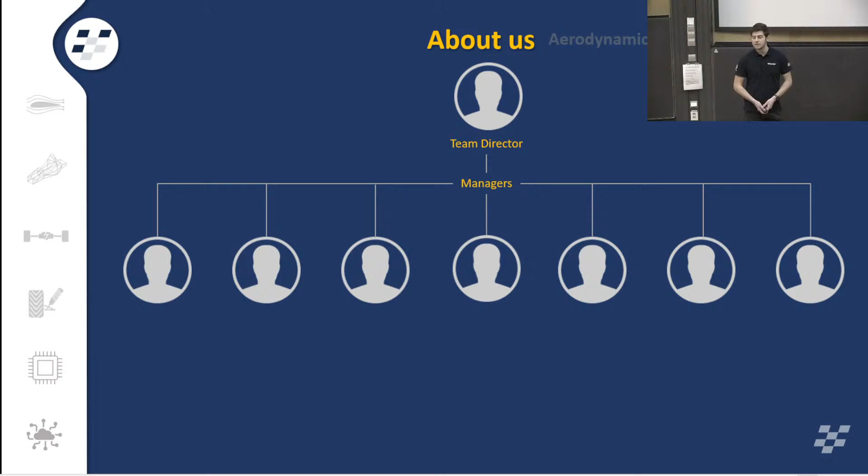The project engineers, such as myself, are all placed under each subgroup and are students studying at the master's level. In addition to this, we also have trainees that voluntarily work towards a faster car and help us out a little bit.

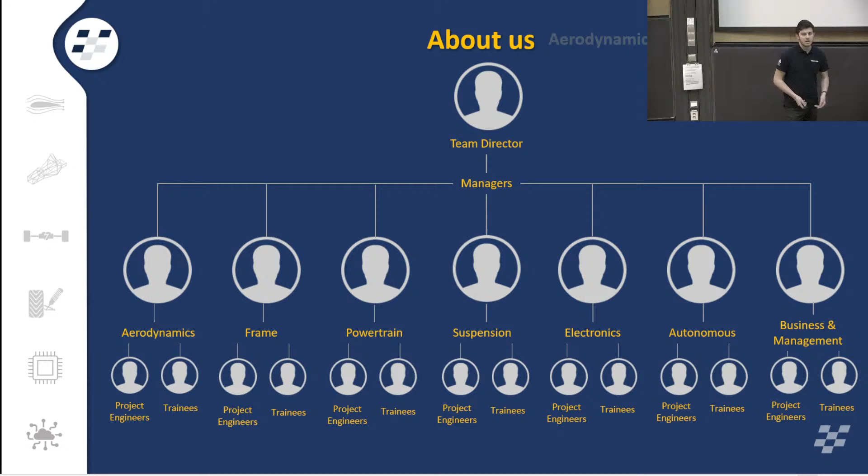After more than 50,000 hours, more than 400 liters of coffee, and over 500 takeaway pizzas ordered from our formula room, we're proud to, for the very first time, present to you the design of our Chalmers Formula Student 2023 car.

A four-wheel driven, fully electrical, both driverless and driver-suited Chalmers Formula Student car. Named after a former queen of Sweden and also a delicious pizza, we're glad to name this year's car Margareta.

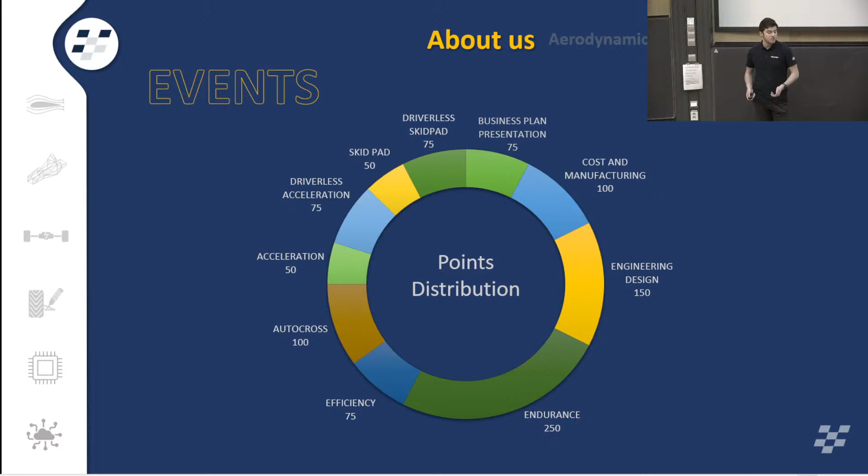The competitions are divided into separate demanding events, where points can be gathered for each successfully completed part. This is how the total amount of points is distributed. The car is tested on endurance, efficiency, acceleration, and its longitudinal and lateral capacities. There are also static events, where it is important to show that the car is not only fast, but also sustainable, appealing, and economical to manufacture.

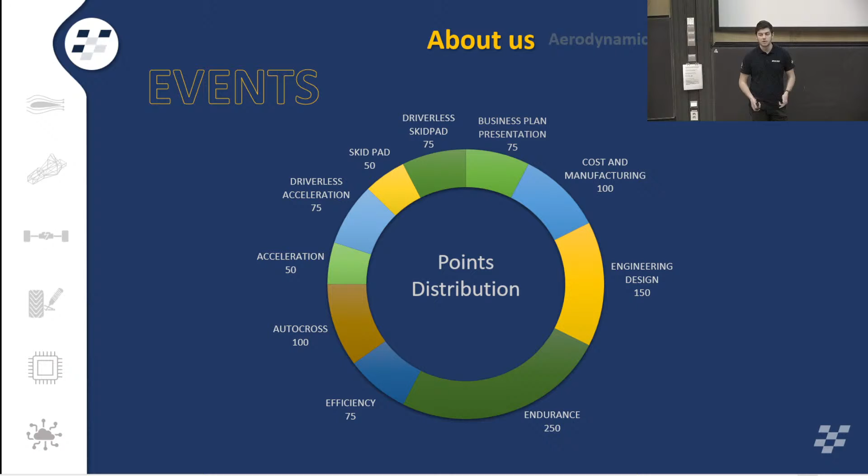With that said, I think it is time to let some of the experts from manufacturing speak for themselves and present how their part is making Margareta as amazing as possible. First up is the subgroup Aero with Hjalmar. Welcome up.

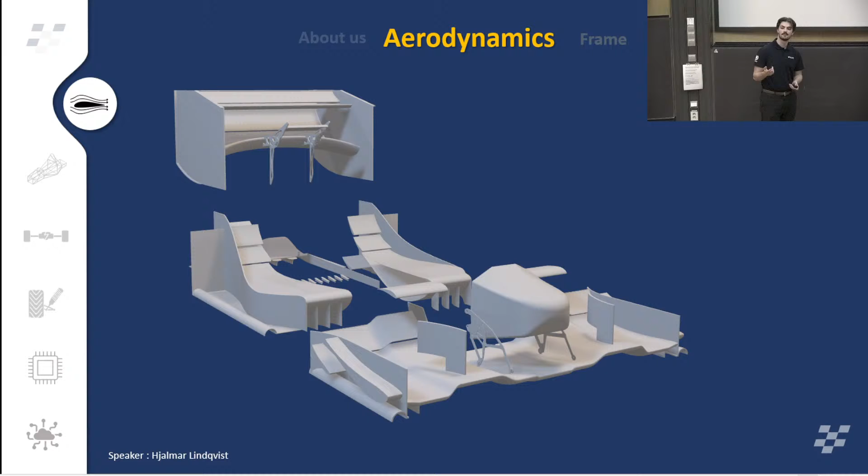Thank you, Kevin. Hello, my name is Hjalmar and I'm representing the Aerodynamics subgroup. Together with my subgroup, we have produced this year's aero package of the car, which you can see here. To make a race car, one important factor is the car's grip. And that's where we come in with one simple word: downforce.

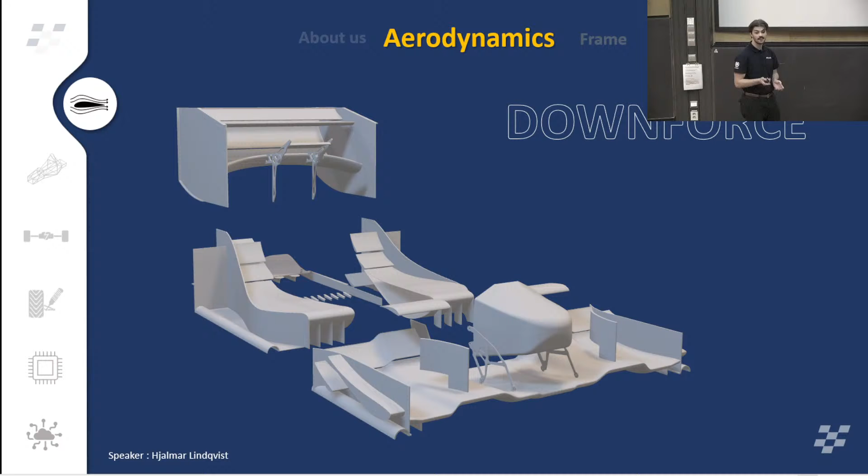Many of you may know, but downforce is the negative lift we can produce by using aerodynamical elements on the car to push the car down into the ground and thus increasing its grip and its cornering velocity, and decreasing lap time. I think we'll delve a bit deeper into the design, so we'll start off with the front wing.

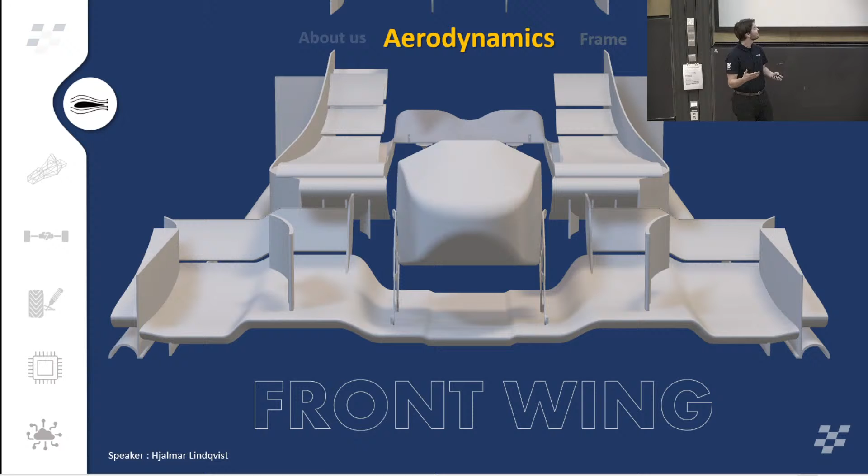The front wing is a very crucial part of the aero package, as it produces a lot of downforce and provides grip for the front end of the car, so the front wheels. But it's also important to make a front wing that doesn't disturb the rest of the aero package behind it. So it's a hard thing to balance the performance of the individual part and the performance of the rest of the car.

Secondly, we have our side structures. The side structures work as large expansion tunnels, which increase the velocity of the air and decreasing the pressure under the car, sucking it down to the ground.

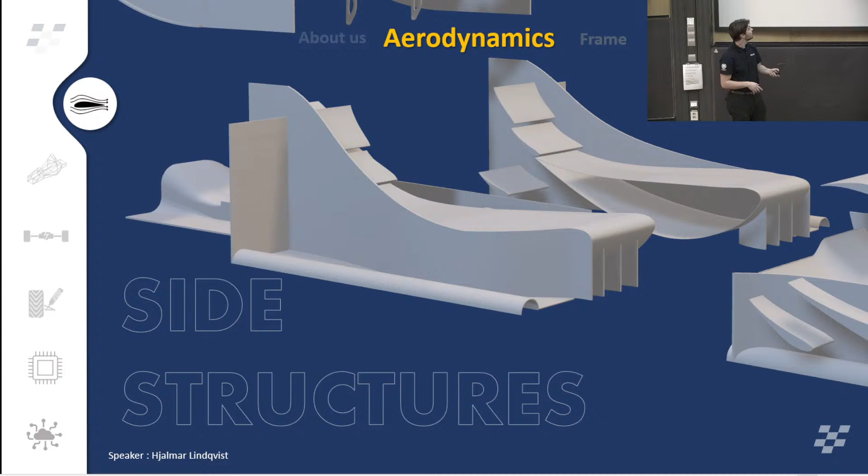Then we have our diffuser. The diffuser works similarly to the side structures by expanding and making a low pressure zone under the car. With this year's reintroduction of the aero step on the monocoque, we now have almost double the amount of

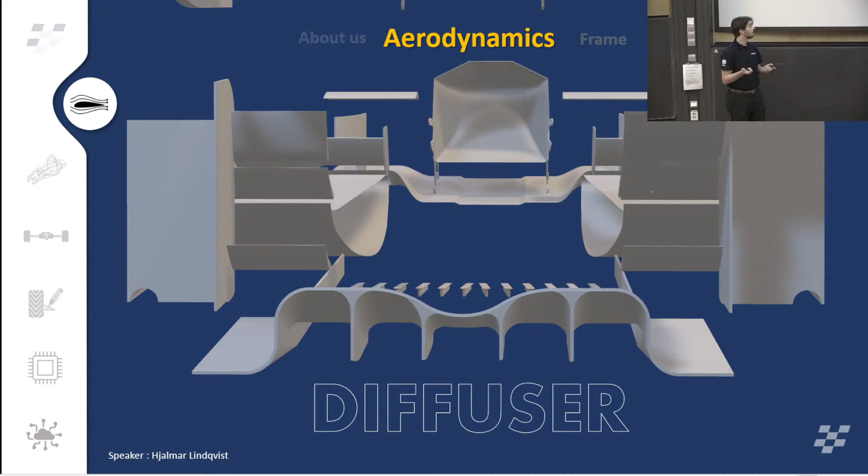downforce than we had last year's on the diffuser, which we are very happy with. Then lastly on the car, we have the rear wing. The rear wing on a Formula Student car is quite huge, because we have such a large volume to work with. This year it has been completely revamped with a new main segment and new smaller flaps like the overwing and other stuff to increase its performance.

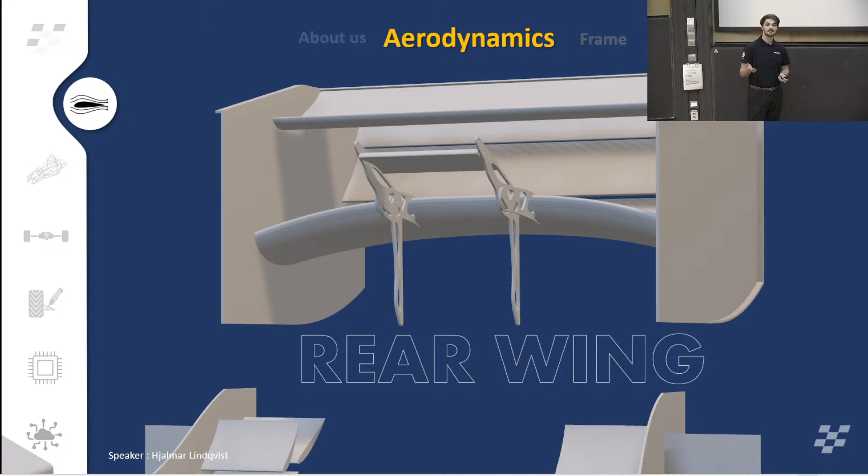And then our final aero package now. I would just like to show you some of our improvements. We have an increase in downforce from last year's car of 10%, with a CLA, a coefficient of lift times the area, of 4.9, which is very respectable. We have also decreased the weight of the entire aero package to 9 kilograms, which we are very happy with.

And with that, I would like to hand you over to Elin, who's going to talk about the frame of the car.

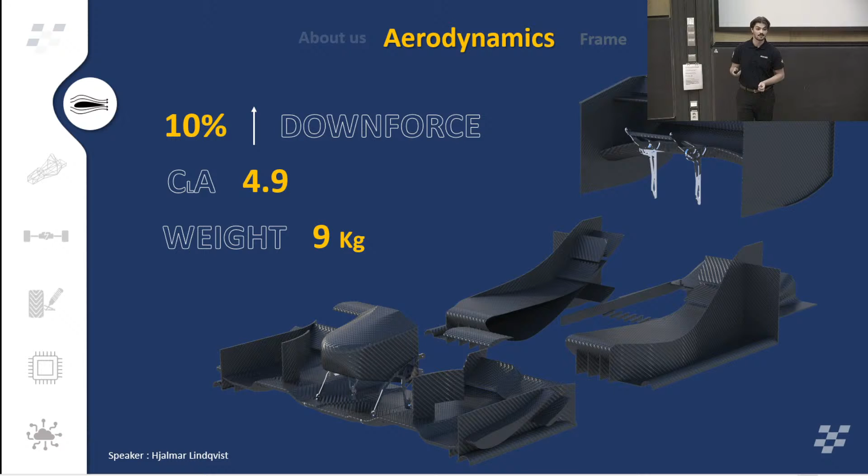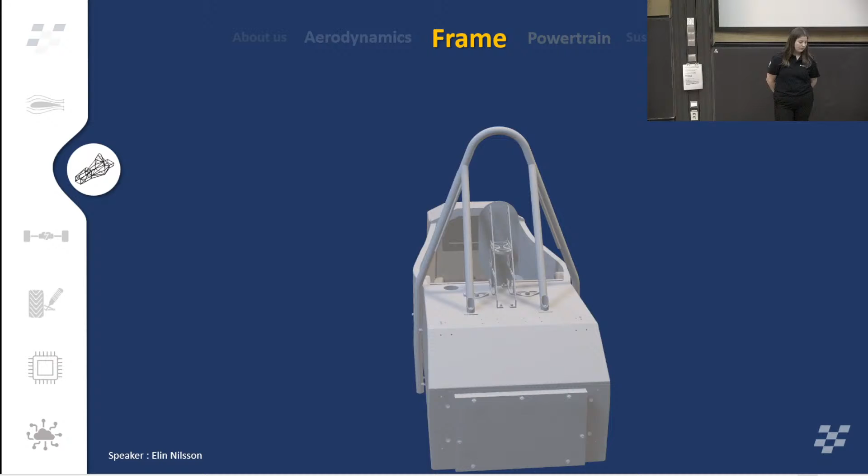In frame we work with the body of the car, the ergonomics of the driver and the safety for the driver. A big focus for us is the safety and of course the strength of the monocoque. We work a lot with packaging to make sure that everything that's supposed to fit in the car can actually fit in the car. We also do a lot with ergonomics this year to make sure the driver can drive as well as possible.

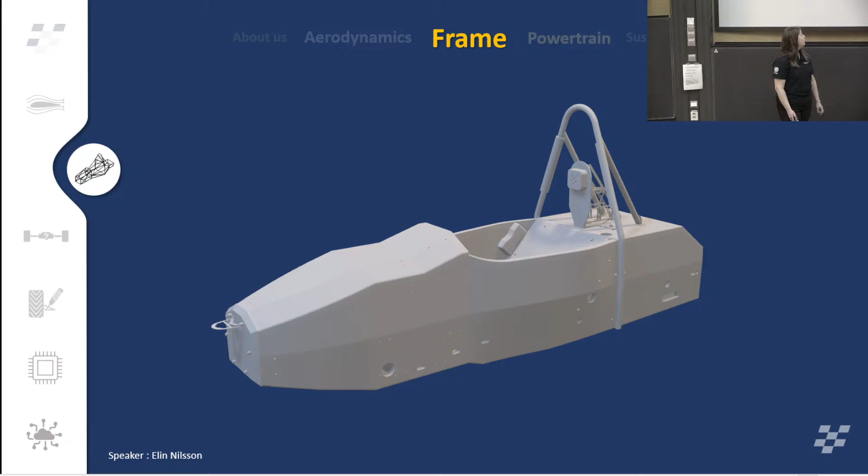The biggest part we have is the monocoque, which is the first thing we're going to talk about. Without it, it's very hard to assemble a car, so that's the biggest reason to make one. The big question is why make a monocoque instead of a tube frame? First, we gain a lot of design freedom in how we want to design the car. We also gain a lot of stiffness through the car, which is very important to transfer the loads from the rear to the front.

The monocoque is made out of sandwich panels that are constructed out of carbon fiber and aluminium honeycomb core. From competitions, we have a lot of requirements on the material to make sure it's safe. These requirements are adapted to a steel tube frame. We do a lot of material testing on our materials to make sure that we can apply to the same requirements.

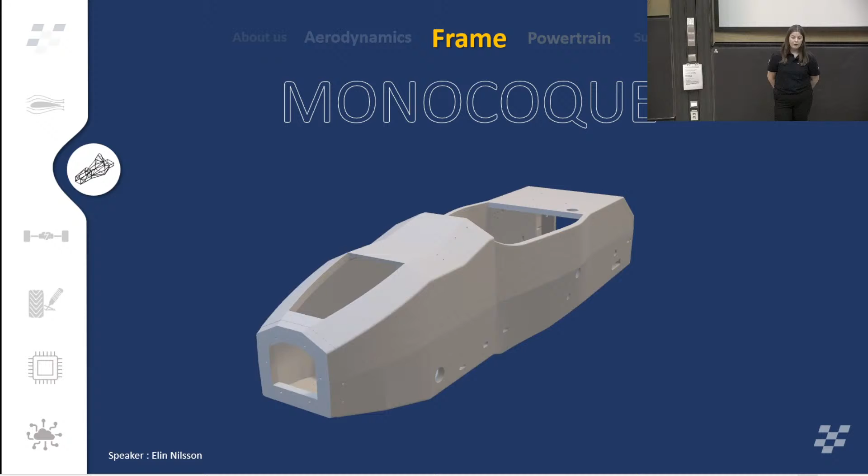The monocoque this year, we are trying to work with simpler shapes to make sure that it's easy to manufacture. We have worked with less carbon fiber to reduce the weight. Some of the features this year that we have introduced is the aerostep, which can be seen in the front floor of the car. We have also reduced, or taken away, the dashboard, which makes it a lot easier to manufacture and reduces manufacturing time. The dash will instead be attached later as a screen.

Next up, we have ergonomics. That's something we worked a lot with this year, we focused a lot of our time on. This is very important for the driver to drive as good as possible. And for us, it's been a big iterative process. We made an ergonomics sheet where we could test all the possible solutions for the drivers to feel what feels best for them.

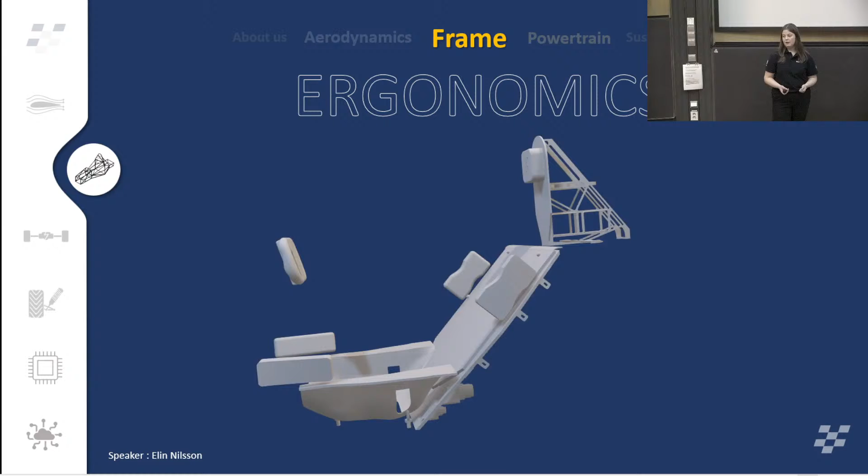First, we have a seat. The seat supports the driver, the bottom part of the driver. We have paddings for the shoulders and legs to be able to take up the lateral loads for the driver. We have optimized the position of the steering wheel as well to make sure the driver has enough space to be able to turn the car well.

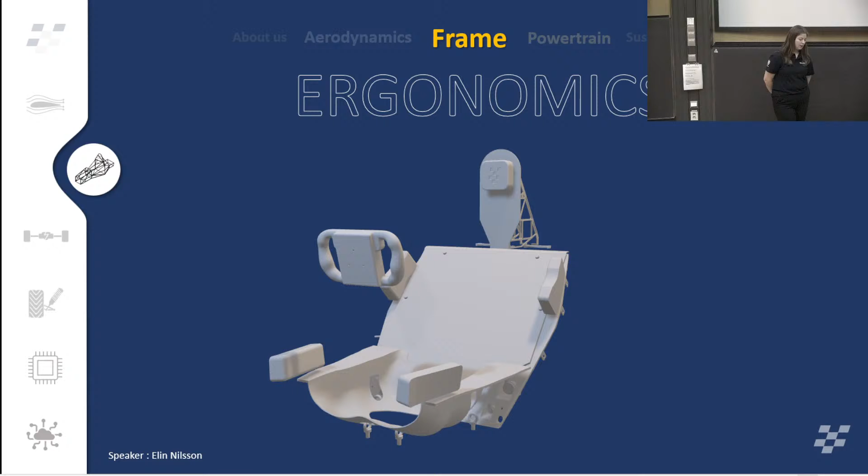Another thing that's very important is, of course, the safety. Safety is something we work with a lot, and there's a lot of requirements on the monocoque, and we have some parts that are designed purely for safety.

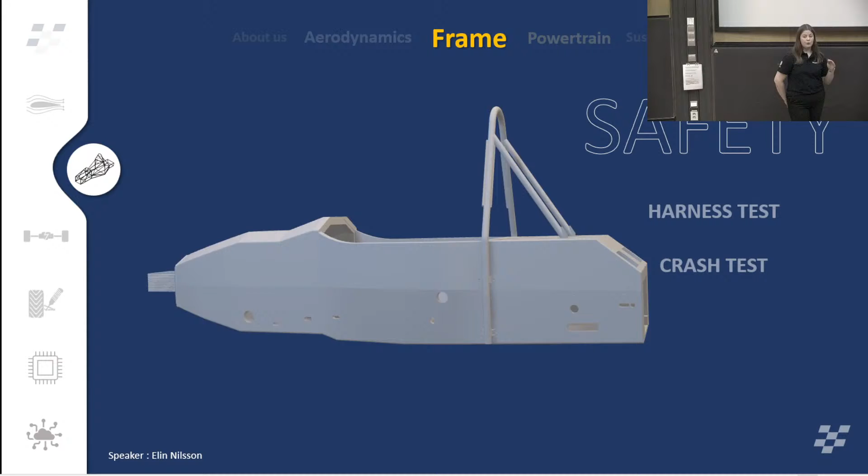First, we have the roll hoops. Those are made so the driver's head is not the highest point if the car gets turned upside down. In the front, we have an impact attenuator and an anti-intrusion plate. In the case of a frontal crash, the car can pick up the load and nothing will penetrate the monocoque.

We have firewalls, one behind the driver and one inside the monocoque, to shield the driver from all the high voltage systems in the car.

And for all of this we do tests. We do tests on all the harness points to make sure that they can take enough load for it to be safe for the driver. We also do a crash test to make sure that the impact attenuator and the anti-intrusion plate can take up enough energy and force to make sure the driver can feel safe while driving the car.

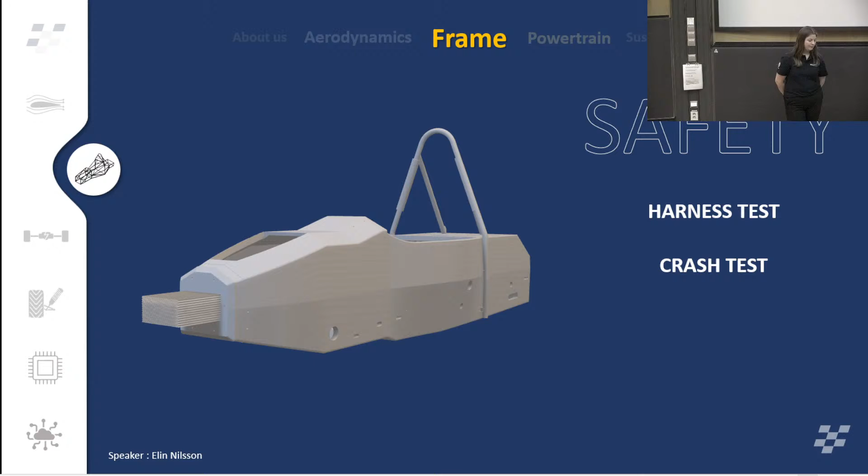To sum this up, in frame, we have worked a lot with reducing weight, design for manufacturability, and also the ergonomics of the driver.

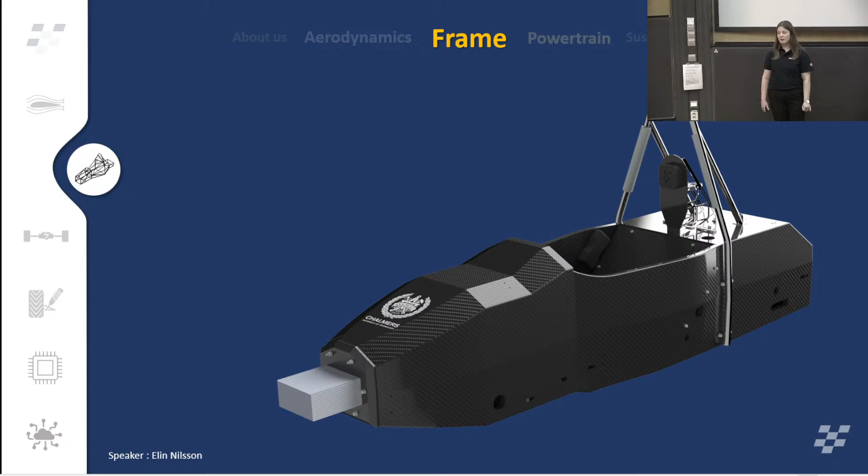Next up, Powertrain is going to talk, and Jesper and Nick are going to present it.

Thank you, Elin. I am Jesper, and I'm here together with Nick to proudly represent the Powertrain subgroup of CFS23. And here we are. So, there we go.

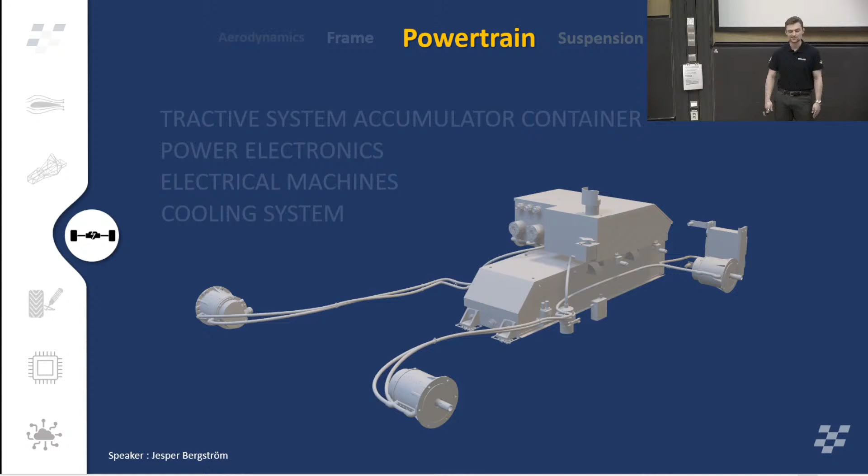All right. So, what actually is the powertrain of the car? It is what stores and delivers the energy all the way out to the engines in order to make the car go forward, basically. And it looks something like this for Margarita. Okay, it consists of 4 major parts, and let's start at the core, which is the Tractive System Accumulator Container, or TSAC in short. It is what contains the battery, but also the management system of it.

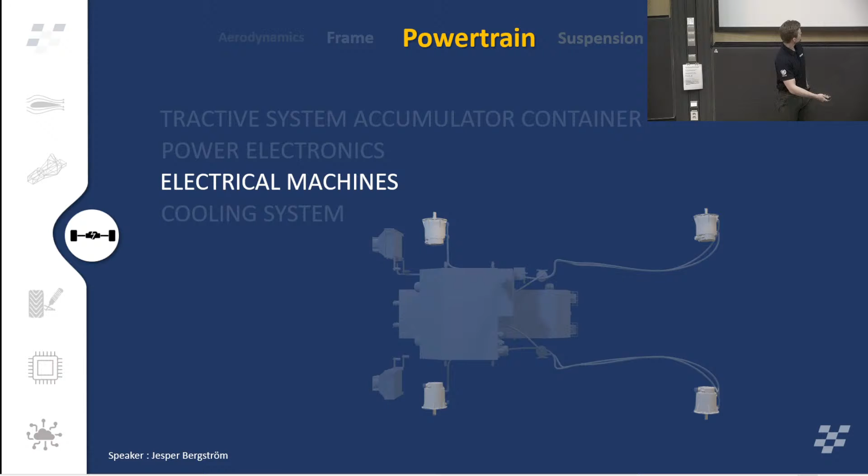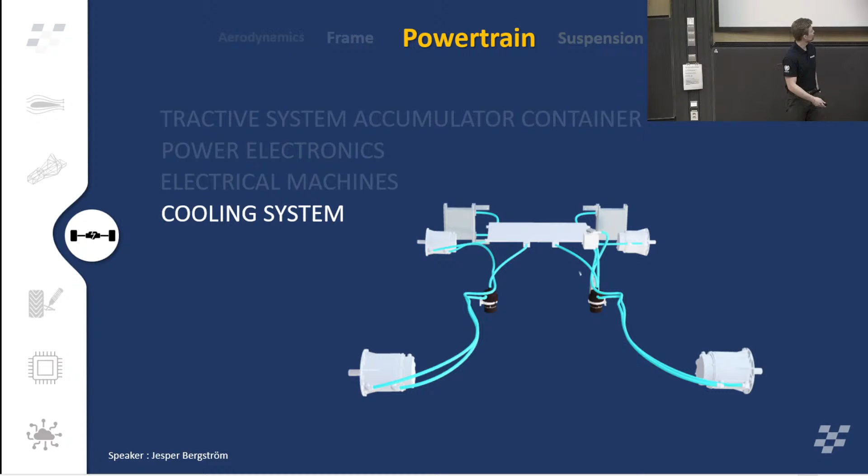From there, the energy is fed forward to the power electronics, which converts the voltage from DC to AC and then feeds it forward all the way out to the engines or the electrical machines. And to keep all of this in its optimal state, we need a thermal management system as well, which keeps everything cool. It's a cooling system. Okay, so let's start by deep diving into the TSAC, and it looks something like this. There we go. All right.

So this is what contains the actual energy in form of the battery and the management system of it. And the box that you see right now is made out of aramid fiber reinforced polymer. And for you who don't know what that is, it's basically the same thing that they use in Kevlar for bulletproof vests and so on. And I'm not entirely sure, but I think that this box might actually be bulletproof as well. So that's kind of cool. We haven't tested it though.

But why are we actually using this material? It has a lot of good benefits: it is fireproof, it is non-conductive, and as I said, it can take a lot of load. And why we need that is because the batteries are kind of a very dangerous part of the car. So we don't want anything to happen to it, even in the scenario of a crash or so on. So we need to make sure that it's always protected from the driver and from everyone around the car.

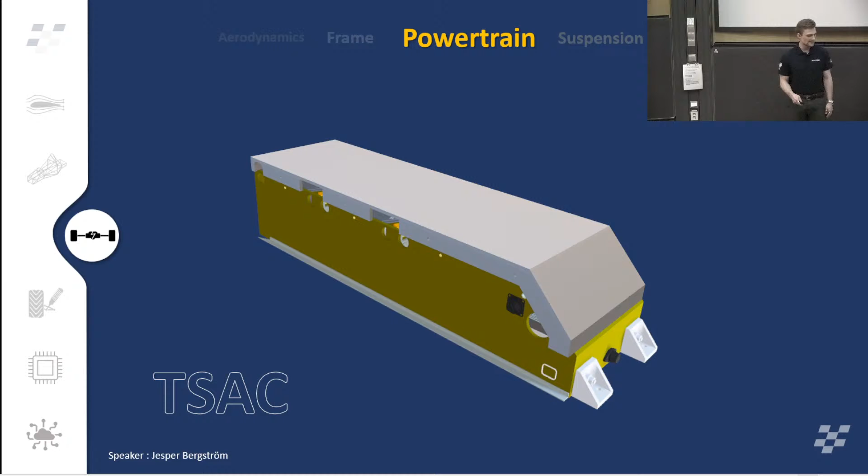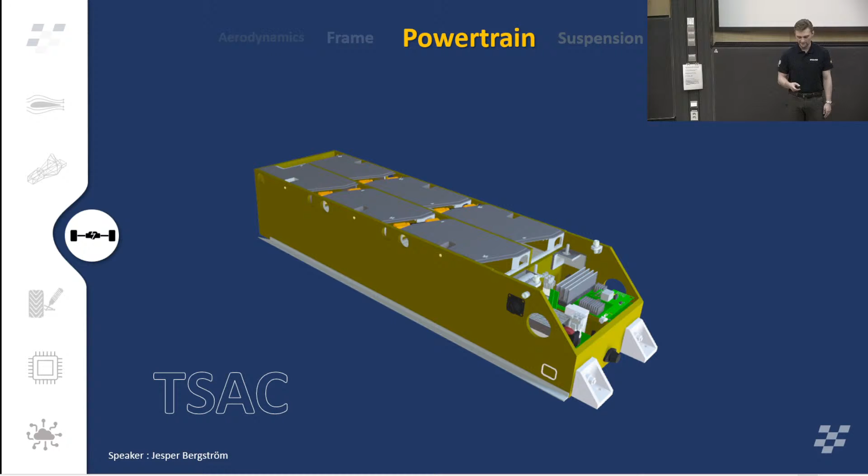And inside, it looks something like this. So in the back there, you can see the 6 grey segments, which are compartments of the energy, basically. And in the front, where you see the PCBs, that is the relay box, the management system of it. And to jump even further in, this is just the accumulator part of it. And for this year, it is totally redesigned because the team are acquiring new battery cells that are a lot improved from last year. And while designing this battery, there were 3 main parts that we aimed for, which was simplicity, safety, and modularity.

And the reason behind that was to make it very easy to work with and to be safe, since it's 600 volts in total. It's very dangerous to touch in the wrong way, and it can catch fire and so on. So we want it to be as easy as possible to work with in order to make as few mistakes as we can. All right. So it consists of 6 segments, as I said. Together they are series connected and make up a peak voltage of around 600 and a capacity of 13 amp hours, which we can deliver all the way out into the car.

And the main change of the new cells that we acquired is basically that the peak recharge rate of the cells is almost 10 times as much as last year. What that means is that we can regen a lot more energy while driving by spinning the motors backward, for instance, when we are braking the car.

And in the long run, that means that, for example, in the endurance event, which is the longest event that we drive during competitions, we can push more power out to the motors and drive faster without actually emptying the battery, since we can regen so much while driving as well. And that in the end scores us more points, and of course that is what wins the competition. So hopefully that's something that's going to happen this year.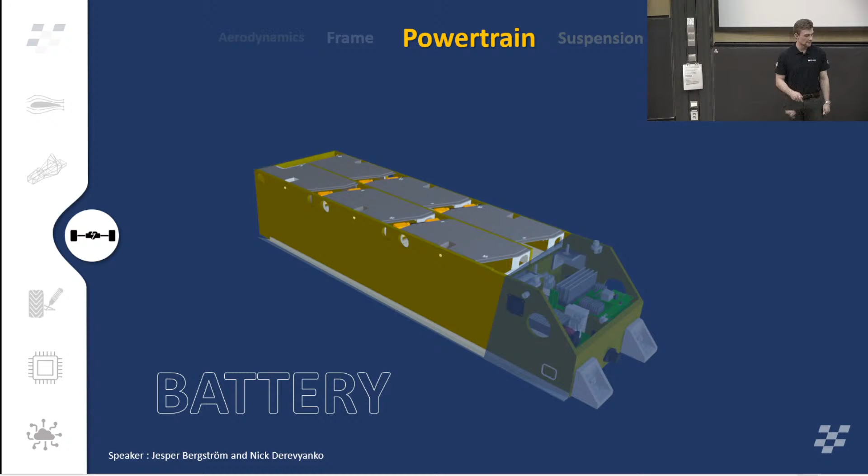Each segment that you see is air-cooled, and each of them has a separate air cooling system. The reason for not having a common system is because the rules kind of make that impossible. And speaking of the segments, they look something like this while assembled. It's basically just a block of 23 cells that are connected. And here's an exploded view of it. And the main part is, of course, the cells, which you see in grey.

And on top of them, you can see 2 PCBs, which are the carrier board and an AMS follower. And the reason why they are there is just to make sure that the cells are connected in the correct way, and also to make sure that we can measure such as cell voltage and cell temperature and so on of everything, to keep everything in a good state. And the rest that you see around it is just a 3D printed fireproof material kind of casing that is there to redirect any loads that are coming onto the battery to make sure that it's as safe as possible.

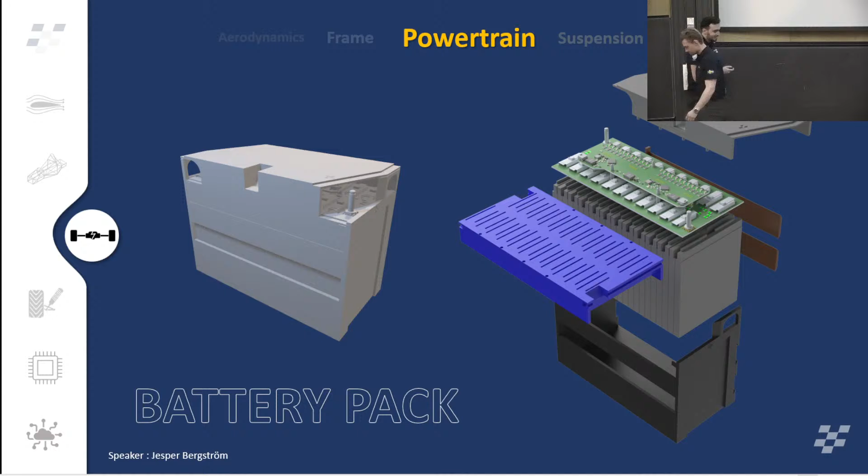So the car has a lot of energy in it. But how do we use this and how do we control it now? Very good question, Jesper. Since we redesigned the battery for this year, we also redesigned the relay part of the battery. So the front part of the battery you can see in front here.

What is the relay box? Why do we need it? So, like the name said, the relay box contains the relays. So the relays enable us to disconnect and connect the car to the battery. So it enables us to connect the 600 volts DC battery we have, as Jesper said, to the vehicle side of our car. Besides the relay box, the relays in the relay carrier, we have more PCBs, of course, in it.

One of them is the AMS master. So we monitor every segment, we monitor every voltage of every segment, thus we can calculate every SOC level of every segment. Further on, we have 2 more PCBs, the AIL and the TSAL. These are 2 PCBs only there to see if the car is actually safe. It shows us if the car is ready to drive and if the car is connected to high voltage or not.

But the most important PCBs you can see here, these two. These are our DC-DC converters 1 and 2. So we are one of the few teams in Formula Student which does not have one single low voltage battery. We rather have one big high voltage battery and convert our high voltage to low voltage. So instead of having 2 batteries, we have 1 battery and low voltage converters.

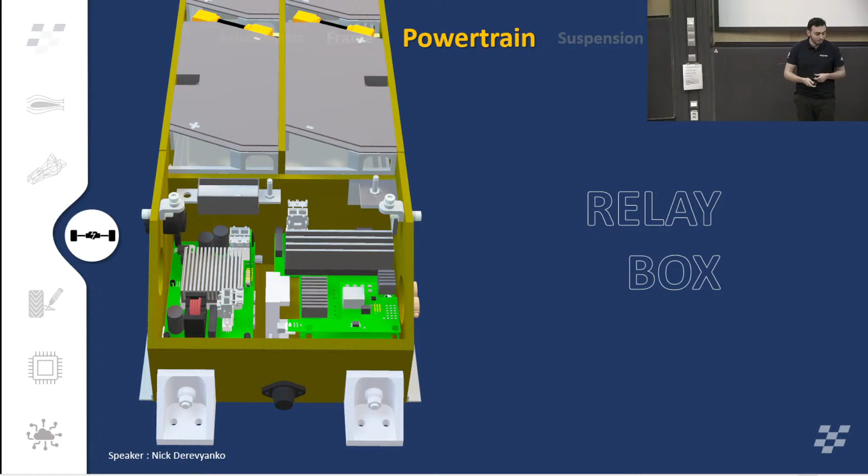So after we connect our battery to the relays, we can transmit our high voltage afterwards to our PE box. The PE box is basically a box which contains our 4 inverters. So we have 1 inverter for each motor. We have 4 motors in total, and it's basically a carryover from last year.

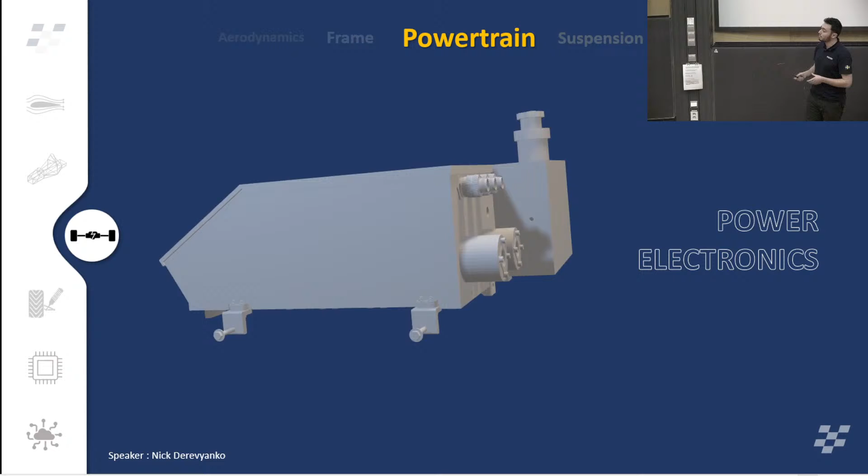What we have modified this year, however, is the mounting of the PE box and also the packaging of the PE box. So what we have now is data loggers, which have a higher frequency of sampling, and we can thus increase the information we gain from our battery.

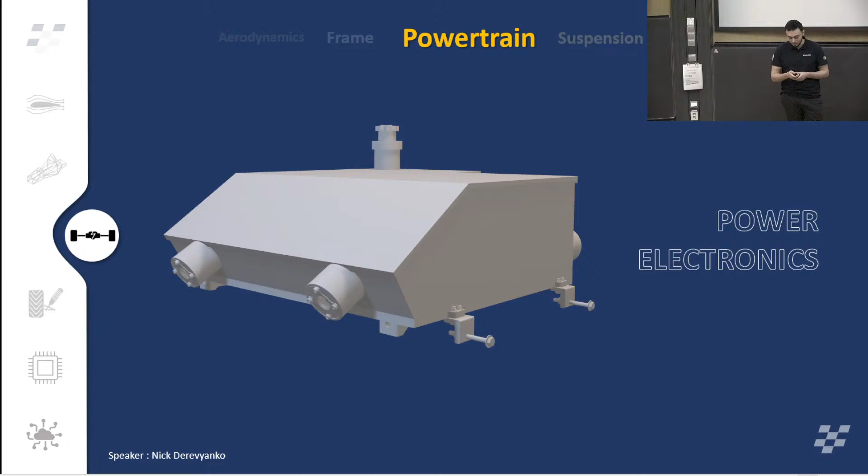After we convert in the PE box our DC current to AC current, it gets fed to our motors. Our motors are also a complete carryover from last year, but we designed the motors as well as the gearbox and the cooling. So we have an additive manufactured cooling jacket which cools our motors and keeps it at an optimal temperature.

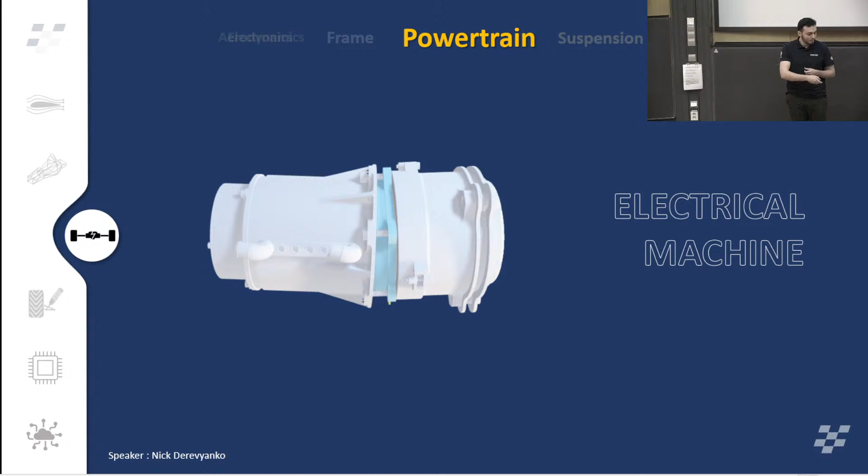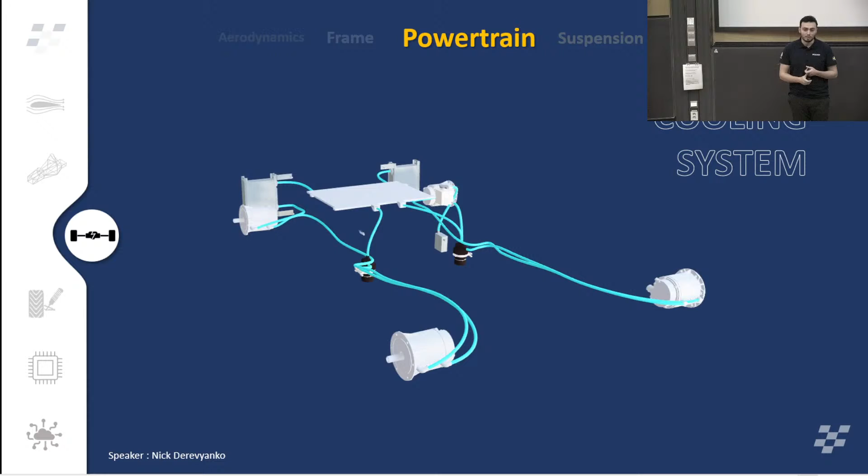And talking about cooling, this year we also improved our cooling system by having new radiators which are more efficient, weigh less, and thus we can have less water in the system and cool our inverters and our motors even more efficiently. So this together makes the whole powertrain this year more efficient, more durable, and probably way faster.

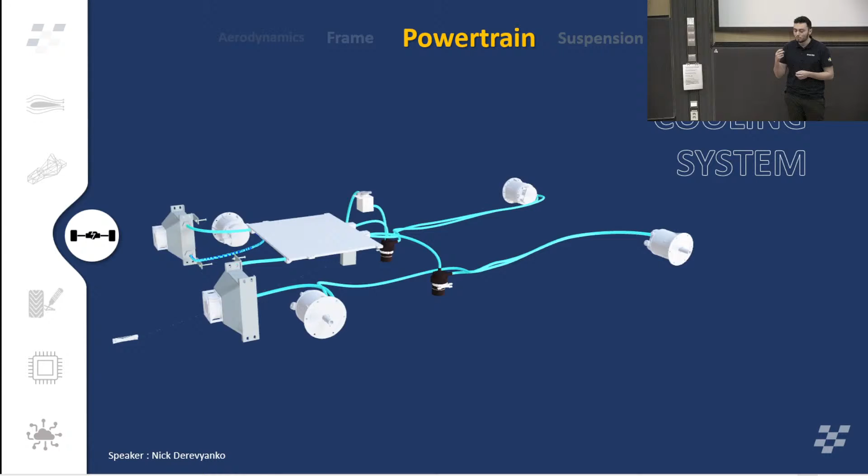So we as NPT deliver the energy from the battery to the motors and then to the wheels. That's our task. Then suspension comes in with Zakari and tries to put the power we gave them to the ground.

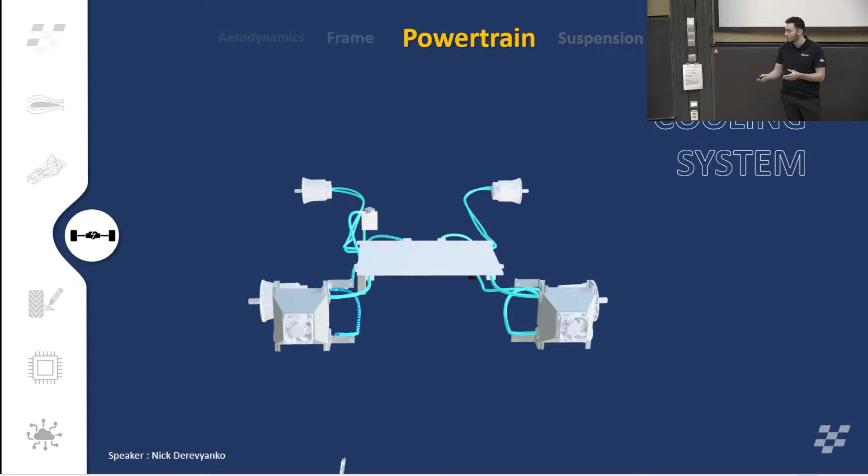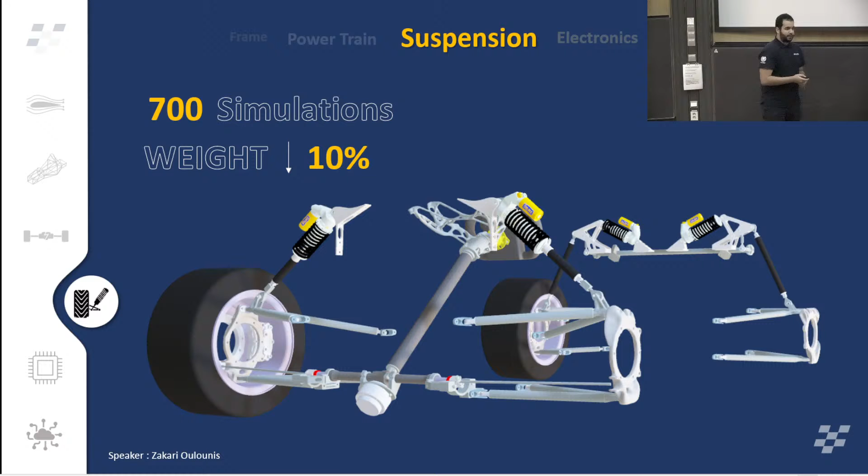One of our main roles is to actually make sure that the tires are the only part that touches the ground. We're also in charge of the overall handling characteristics and how the vehicle reacts to the road inputs. I will showcase the main component that helps with the road input, and that is the actuation.

This year we have reworked the overall actuation system. In the front actuation system, we have a direct actuation with coupled heave and roll motion. This here is quite simple by having the damper directly connected to the wheel package.

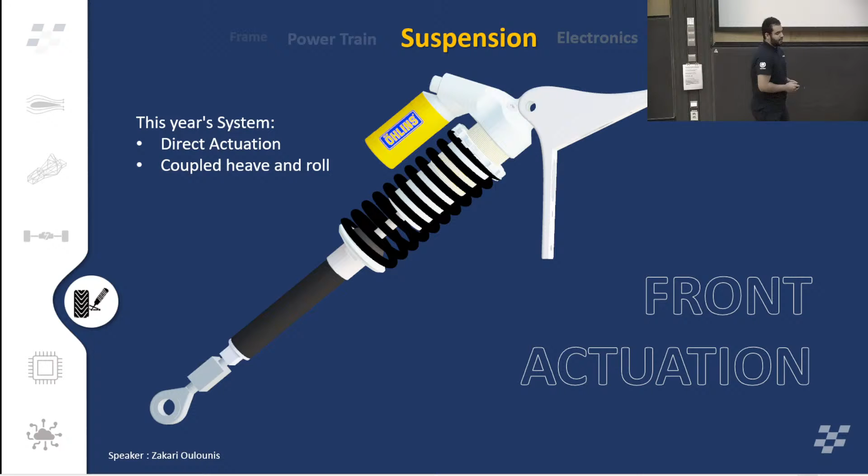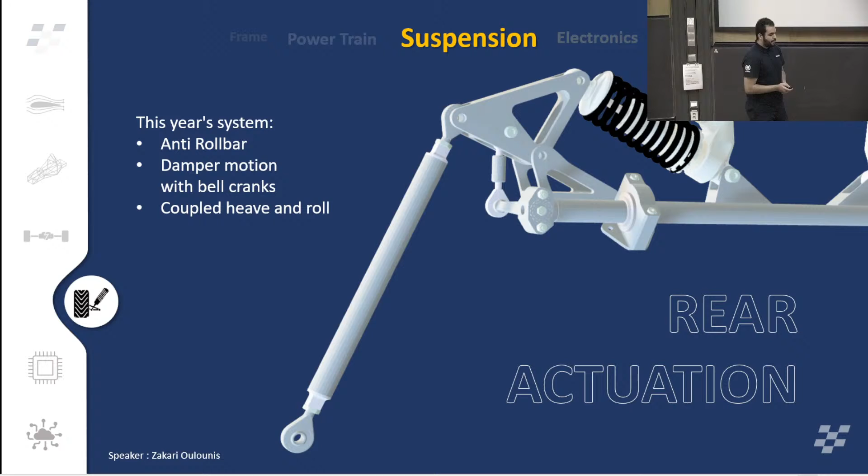Next, in the rear, it's more complex. We decided to go with an anti-roll bar to be able to adjust the stiffness and the overall roll distribution. We also have a bell crank system where we can control the motion ratio by how it's connected to the wheel package. We also have dampers which allow a huge range of tunability by having different and independent low speed and high speed compression and rebound damping coefficients.

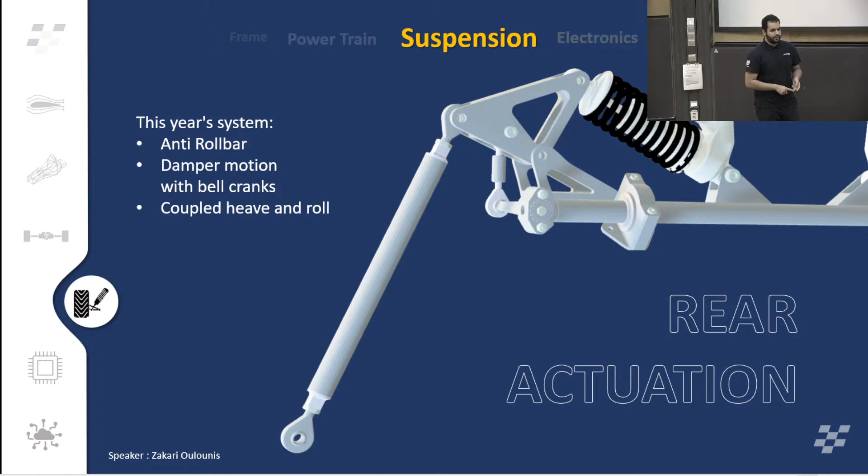Next, one of the ways we managed to achieve the 10% weight decrease that I showed in the first slide is by having a method of design which allows us to have topology optimized parts. Those parts are more organic and they follow the load path that they are actually subjected to. And that allows us to minimize the mass with the required stiffnesses.

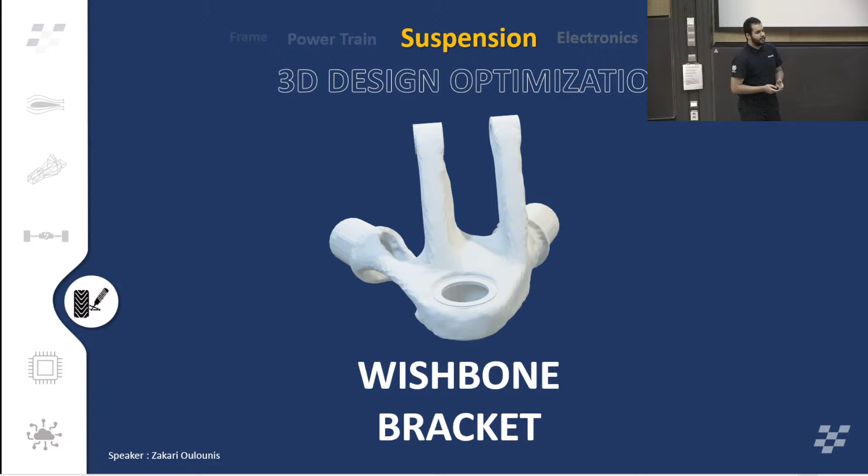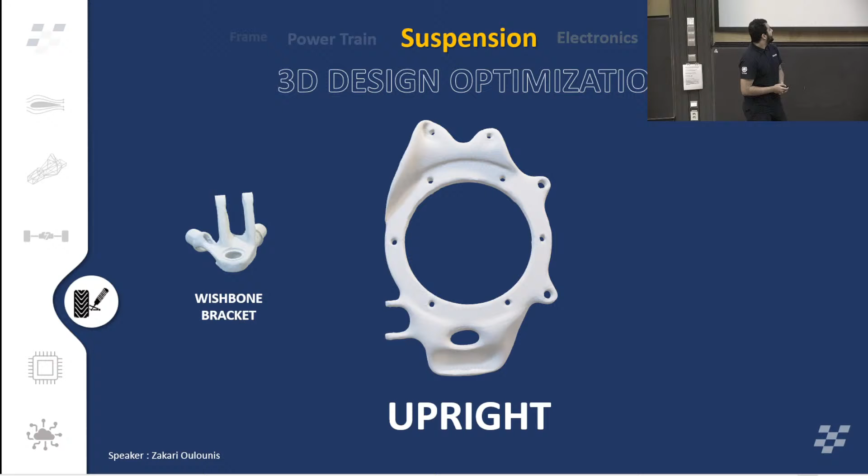Some of the parts are the wishbone bracket, which is the part that connects the linkages to the vehicle and the wheel package. Next, we have the upright. So this is where we have the connection between the powertrain, where the drivetrain is connected to the suspension system. And next is the steering bracket, which is how we hold our steering column to the frame.

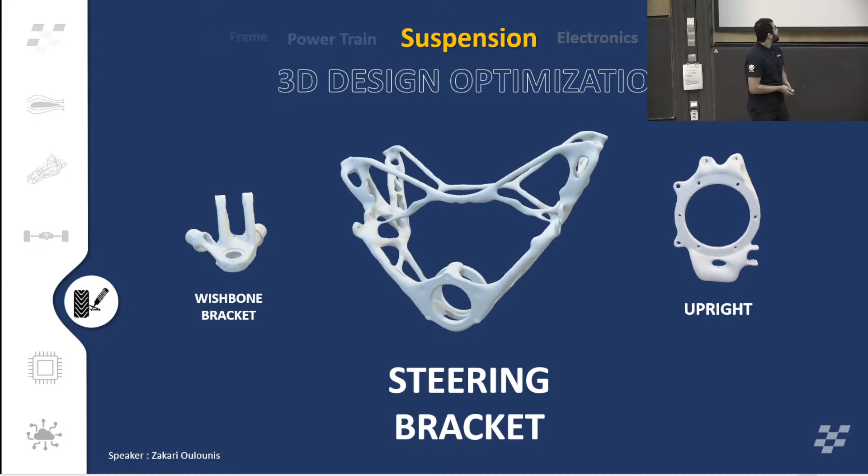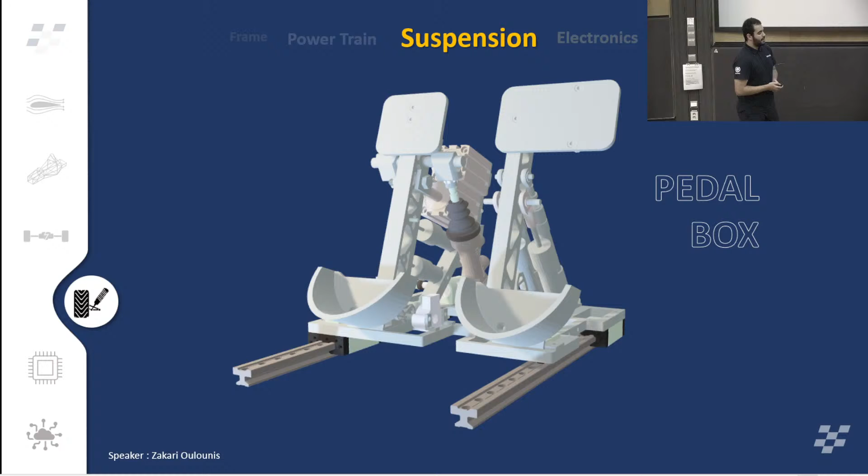We're also in charge of the braking system and the pedal box. So this year's pedal box has completely been reworked with a new design. It has to be adjustable for a different class of drivers, but it has to accommodate as well for the autonomous system. So it has to incorporate both the hydraulic braking system that is used for the driver and the pneumatic actuators which are used to brake for the autonomous system. The actuators can be seen in the back of the pedals. This year, we have greatly improved the ergonomics and how we are able to adjust it. I will now let Amandus present for the electronics.

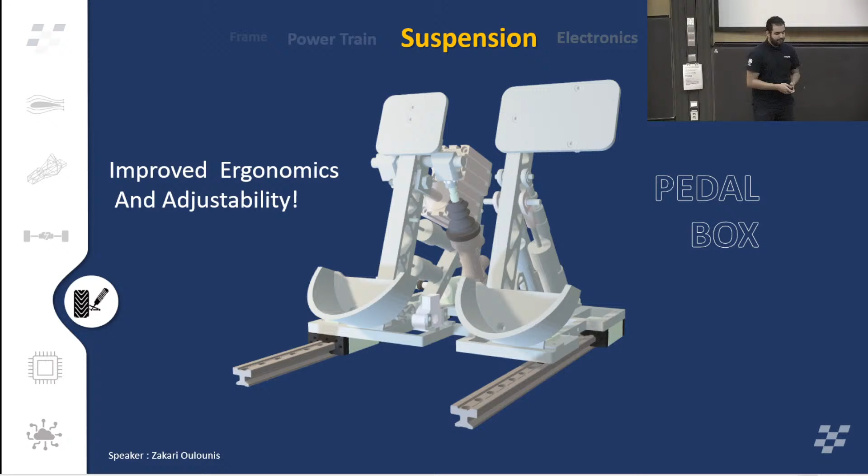Thank you, Zakari. All right, so my name is Amandus, and I'm a part of the electronics subgroup, together with my co-workers up here. In the electronics subgroup, we are divided into 3 different subdomains, which are hardware, software, and control systems. I'm going to briefly introduce the different subgroups, as well as what we are currently working on in this year's iteration of the car.

And for this year, we have worked very hard to streamline the entire electronic system. We have removed several microcontrol units and combined other components together onto singular printed circuit boards. This will hopefully make for a car that is easier to manufacture and to do maintenance on.

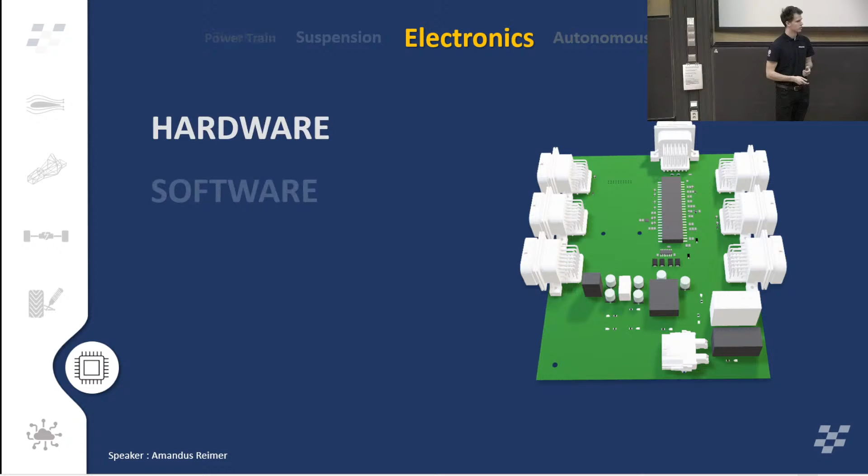Next up is the software. The software uses these microcontrol units to be able to make informed decisions. To borrow one of the older sayings, the software is the brains that use the network made by the hardware to make informed decisions. Due to the reduction of the nodes and the combination of other PCBs, we have been forced to restructure the code a bit to fit the new layout better. We are also working hard on enhancing the driver-to-car interface so that more relevant information is displayed to the driver during runs, and so that the driver can also make some small adjustments during the run.

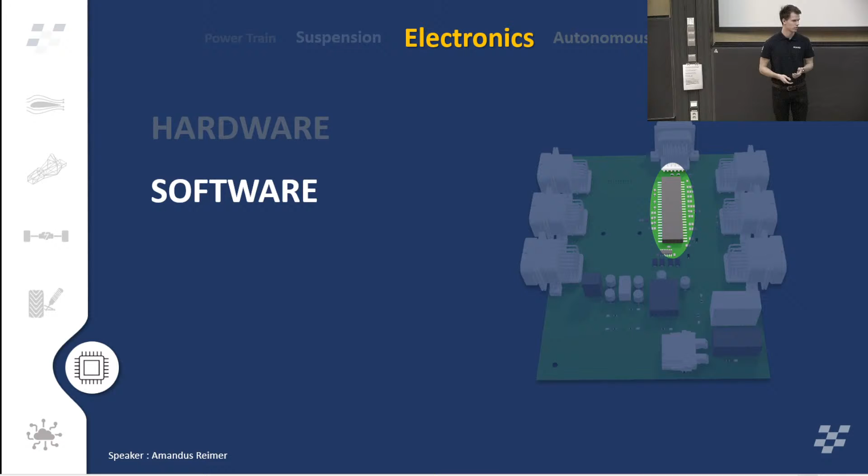Lastly, we have the control systems. The control system's main goal is to make the car utilize the systems it has in the most efficient way possible. This involves mainly monitoring battery and motor usage. For this year, one of the things we're working on is a more efficient power limiter. The goal of the power limiter is to make sure that we draw as much power from the accumulator as possible, whilst still complying with the rules of the competition. There's a limit on how much average power we can draw from the accumulator, so we want to make sure that we are close to the border, but not quite above it. This is achieved by monitoring it closely and regulating.

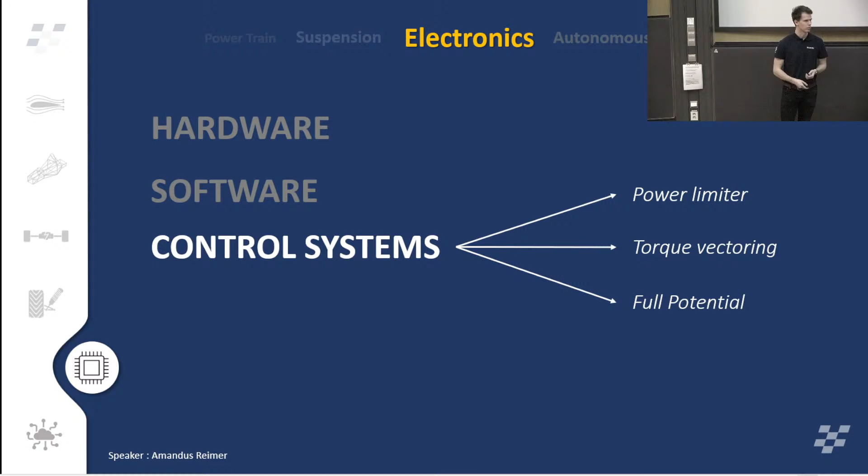Another thing that the control system group is working on is torque vectoring. Torque vectoring is distributing the available torque optimally to the different motors to make sure that we align the actual acceleration with the desired acceleration, to make the car run in the way that we want. To wrap up, all of the control systems use software and calculations to make sure that we utilize the systems optimally, because otherwise we could just as easily have worse components if we're not using them properly. And this has been all for me, so I'm going to hand it over to the autonomous group and Anton.

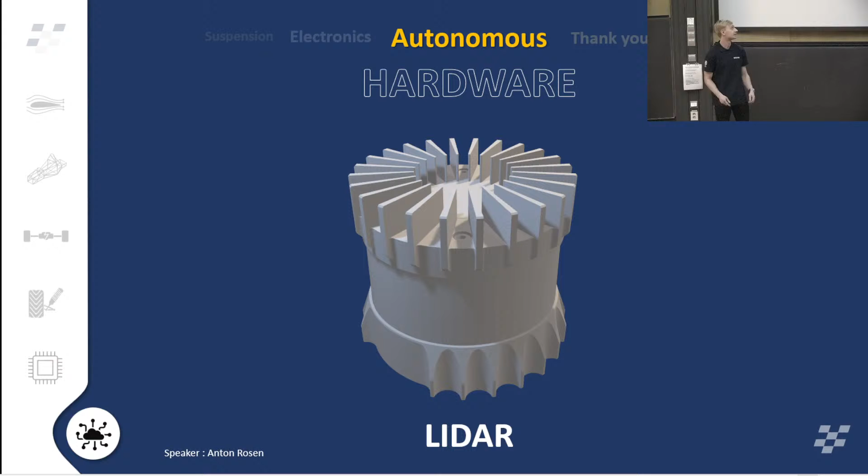Besides being able to see, we also want to know where we are and how fast we're going. This is where our high precision IMU sensor comes in, which combines accelerometer and gyroscope measurements together with satellite tracking to give us centimeter level precision, both in position and in velocity.

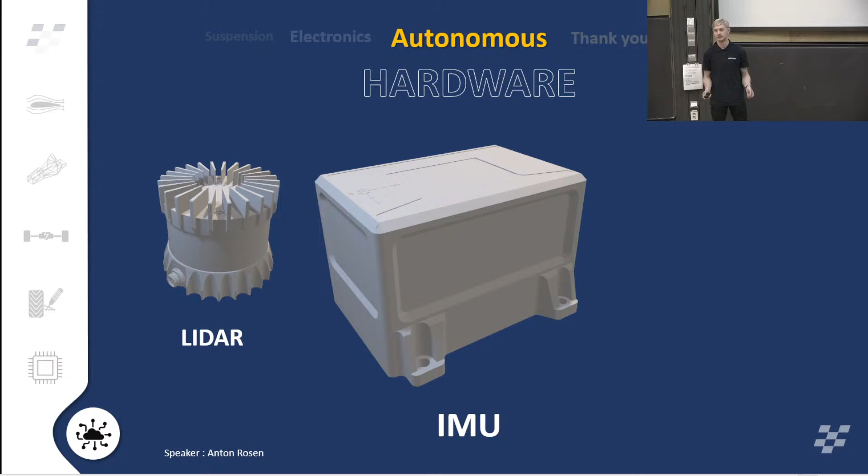But knowing the environment is not everything. We also need to be able to interface with the car to make it go forwards. So for steering, we are using a small form factor pancake motor. For throttle, we can simply send commands to the power electronics. And for braking, we can utilize the regen that Jesper talked about, as well as the pneumatic actuators that Zakari mentioned earlier.

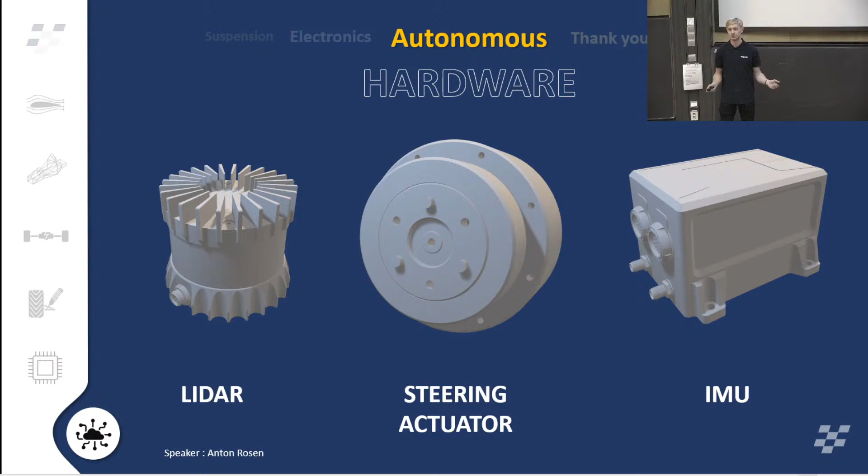Not pictured here is the driverless computer, which ties everything together. It collects all the information from the sensors, processes it, and sends the appropriate commands to all of our motors.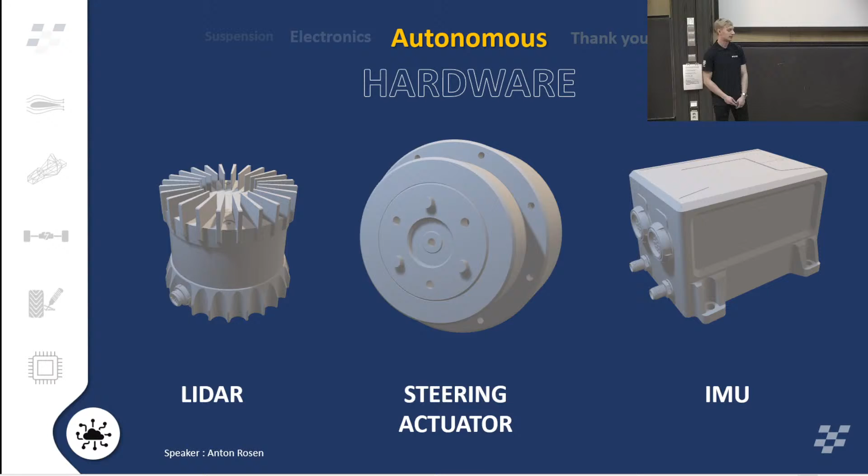This brings us over to the software part. So we are running a ROS2 based system where we have so-called nodes running in Dockerized containers. This allows us to manage our very large code base in a nice way and allows us some modularity in our system.

The first one of these nodes is the perception node, which handles the point cloud data that we get from the LiDAR and processes this from raw points into the cones that make up the track.

A short run-through of this process is that we first take the raw points, we detect the ground, we remove the ground, perform clustering on the remaining points, we then reconstruct the cones, and then try to validate and see that there actually are cones. This entire process we're able to do in less than 5 milliseconds, which is very, very fast.

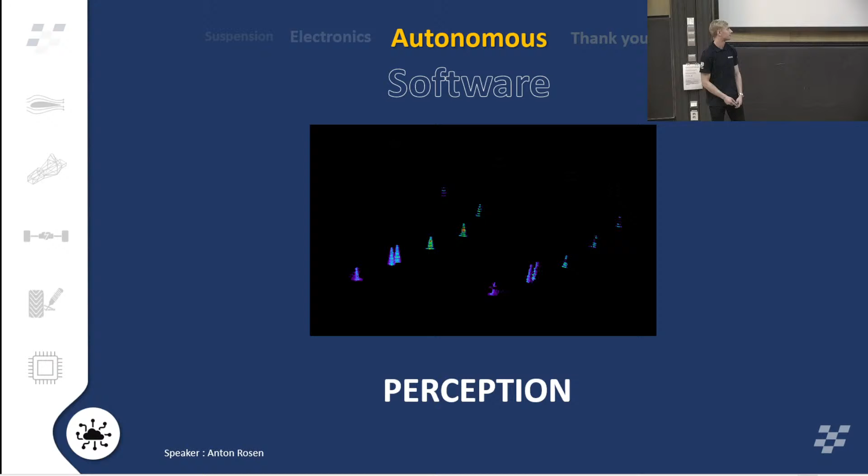The cones that we get from the LiDAR are in the local frame of view of the car. To be able to save this in a sort of global map, we use a graph-based SLAM algorithm, which associates the newly seen cones with the ones that are already in the map and continuously optimizes over this graph to get a consistent map as well as the car's position within that map.

When we have the entire track, we can plan the path that we want to go. So we then plan for the center line of the path and use our control algorithms to follow that as closely as possible. We are using a decoupled longitudinal and lateral controller, which allows us a lot of flexibility in the way we tune the steering and the throttle.

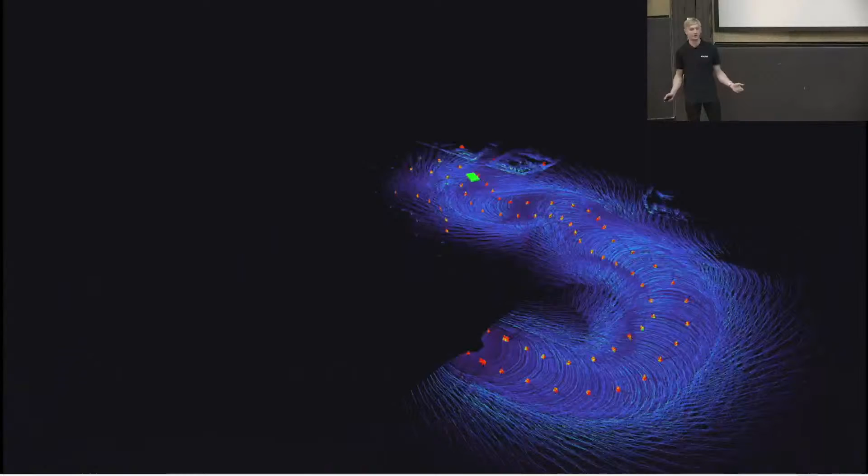To show all of this in action, we have a short video which visualizes what the autonomous car sees and how it drives. This is real-time data from one of the testing sessions we did during the fall. What you're seeing is the raw point cloud that we get from the LiDAR, aggregated in the global map of our SLAM algorithm. Here you can see it in the map frame of view.

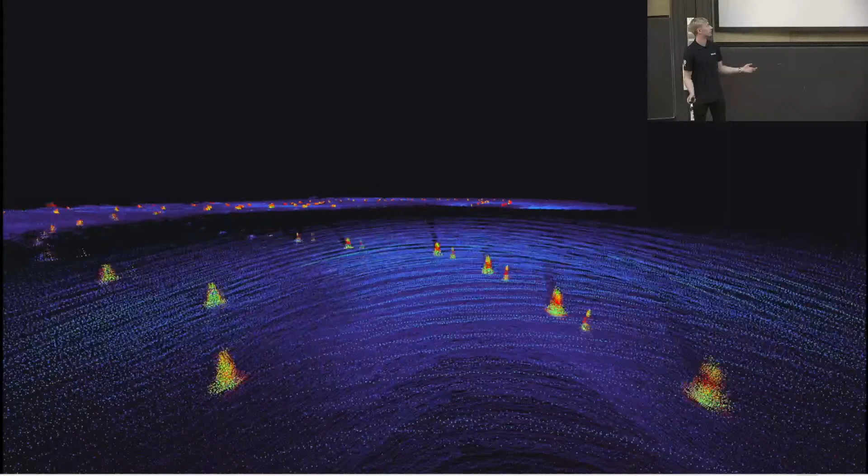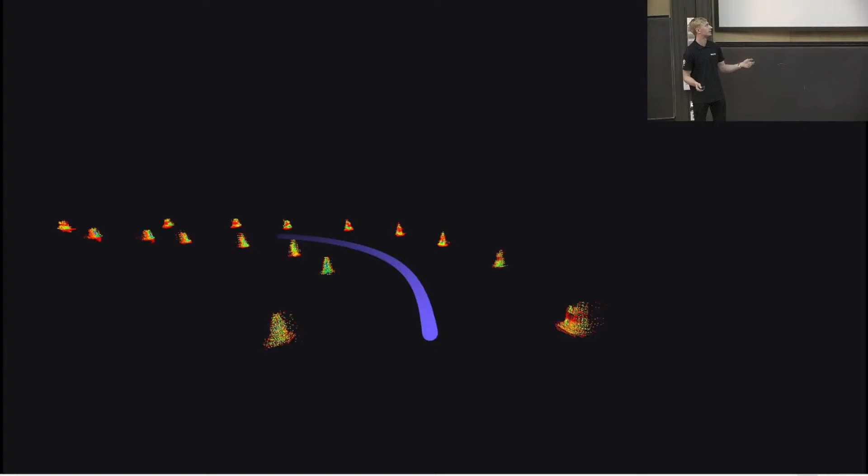With the point cloud, we first remove the ground and then perform the filtering to get only the cones. These cones are then stored in our global map, and we plan the perfect path to go through the track, which we are then following with our control algorithms. All of this tied together leads to a consistent track and a car that can move through the track with precision.

And that is all for me. I will now hand the torch back to Kevin, who will say some final nice words.

Thank you for all the technical presentations. Together we work efficiently and sharply towards a faster and more functioning car. With a lighter and more tested Formula Student car, we aim to have Margareta fully manufactured and ready to drive by the end of May. With a larger Chalmers Formula Student team, we aim for the top 5 in all competitions.